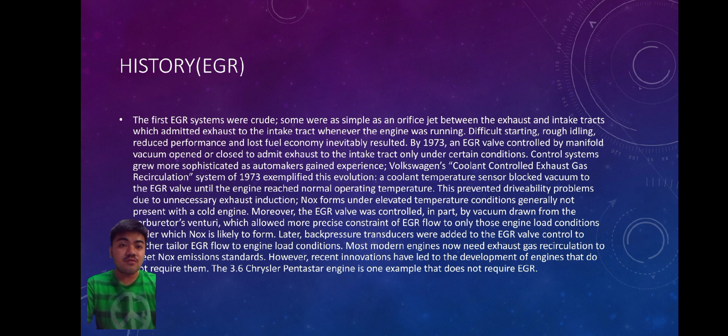The exhaust gas contains water vapor and carbon dioxide, which both have lower heat capacity ratio than air. Adding exhaust gas therefore reduces pressure and temperature during the isentropic compression in the cylinder, thereby lowering the adiabatic flame temperature. In a typical automotive spark-ignited engine, 5% to 15% of the exhaust gas is routed back to the intake as EGR.

The maximum quantity is limited by the need of the mixture to sustain a continuous flame front during the combustion event. Excessive EGR in a poorly set up application can cause misfires and partial burns.

Although EGR does measurably slow combustion, this can largely be compensated for by advancing spark timing. The impact of EGR on engine efficiency largely depends on the specific engine design, and sometimes leads to a compromise between efficiency and NOx emissions.

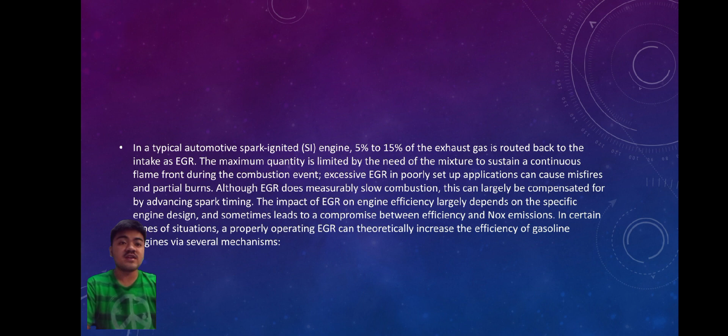In certain situations, properly operating EGR can theoretically increase the efficiency of gasoline engines via several mechanisms. First, reduced throttling losses: the addition of inert exhaust gas into the intake system means that for a given power output, the throttle plate must be opened further, resulting in increased inlet manifold pressure and reduced throttling losses.

Second, reduced heat rejection: lowered peak combustion temperatures not only reduce NOx formation, they also reduce the loss of thermal energy to combustion chamber surfaces, leaving more available for conversion to mechanical work during the expansion stroke.

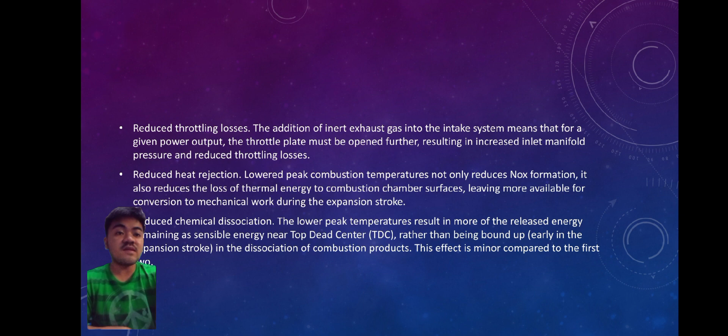Third, reduced chemical dissociation: the lower peak temperatures result in more of the energy remaining as sensible energy near top dead center, rather than being bound up in the dissociation of combustion products. This effect is minor compared to the first two.

EGR is typically not employed at high loads because it would reduce peak power output, since it reduces the intake charge density. EGR is also omitted at idle because it would cause unstable combustion, resulting in rough idle.

Since the EGR system circulates a portion of exhaust gases, over time the valve can become clogged with carbon deposits, which will prevent it from operating properly. Clogged EGR valves can sometimes be cleaned, but replacement is necessary if the valve is faulty.

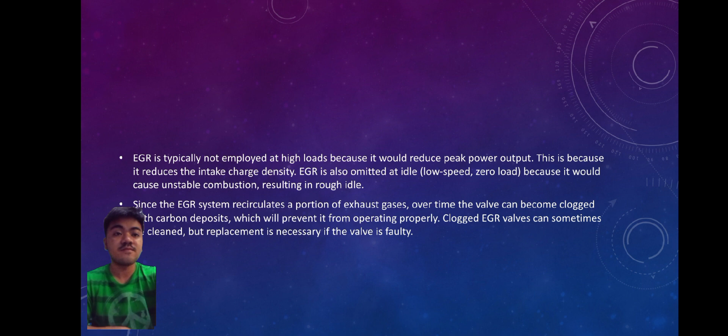In internal combustion engines, exhaust gas recirculation, or EGR, is a nitrogen oxide, NOx, emissions reduction technique used in petrol or gasoline, diesel engines, and some hydrogen engines.

EGR works by recirculating a portion of an engine's exhaust gas back to the engine cylinders. The exhaust gas displaces atmospheric air and reduces oxygen in the combustion chamber. Reducing the amount of oxygen reduces the amount of fuel that can burn in the cylinder, thereby reducing peak in-cylinder temperatures. The actual amount of recirculated exhaust gas varies with the engine operating parameters.

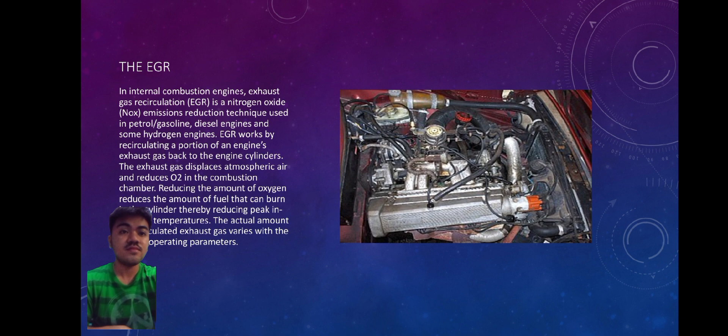In the combustion cylinder, NOx is produced by high temperature mixtures of atmospheric nitrogen and oxygen. This usually occurs at cylinder peak pressure.

In a spark ignition engine, an ancillary benefit of recirculating exhaust gases via external EGR valves is an increase in efficiency, as charge dilution allows a larger throttle position and reduces associated pumping losses.

Mazda's turbocharged Skyactiv direct injection gas engine uses recirculated and cooled exhaust gases to reduce combustion chamber temperatures, thereby permitting the engine to run at higher boost levels before the air-fuel mixture must be enriched to prevent engine knocking.

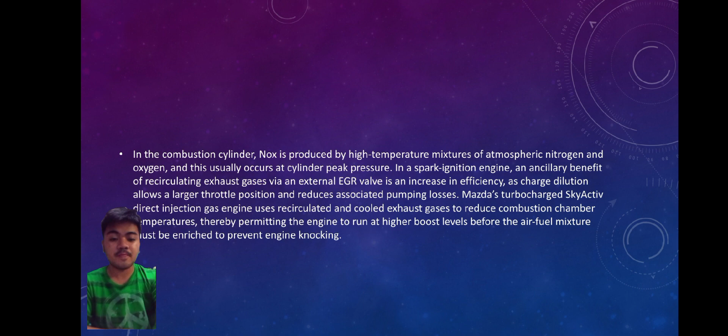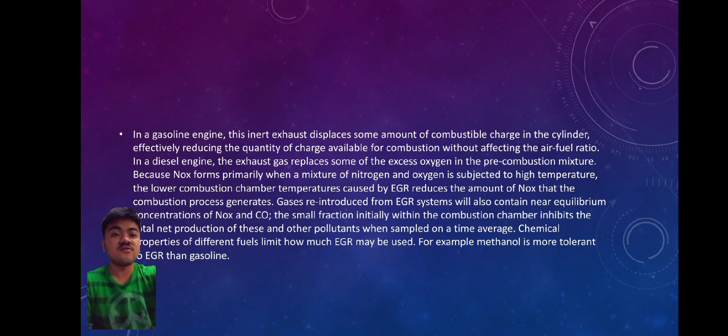In a gasoline engine, this inert exhaust displaces some amount of combustible charge in the cylinder, effectively reducing the quantity of charge available for combustion without affecting the air-fuel ratio.

In a diesel engine, the exhaust gas replaces some of the excess oxygen in the pre-combustion mixture, because NOx forms primarily when a mixture of nitrogen and oxygen is subjected to high temperature. The lower combustion chamber temperatures caused by EGR reduce the amount of NOx that the combustion process generates.

Gases reintroduced from EGR systems will also contain near equilibrium concentrations of NOx and CO. The small fraction initially within the combustion chamber inhibits the total net production of these and other pollutants when sampled on a time average. Chemical properties of different fuels limit how much EGR may be used.

For example, methanol is more tolerant to EGR than gasoline.

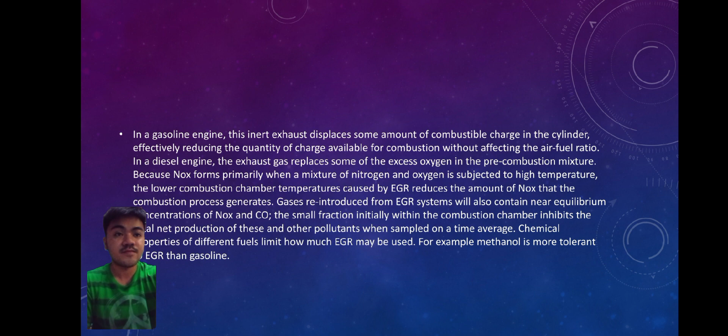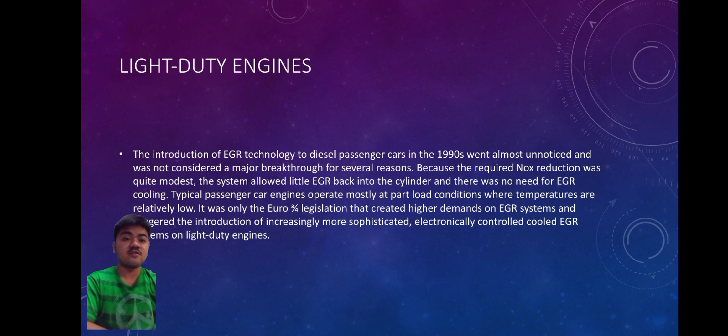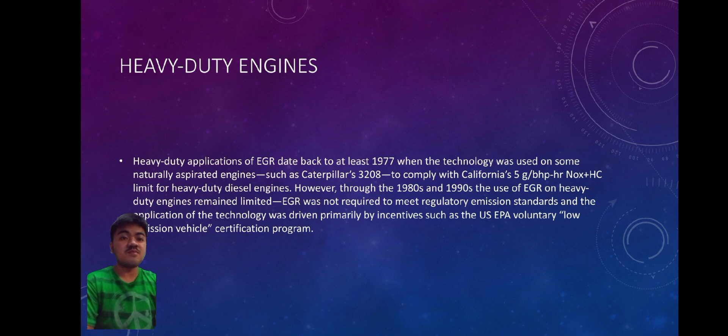However, through the 1980s and 1990s, the use of EGR on heavy-duty engines remained limited. EGR was not required to meet regulatory emissions standards, and the application of the technology was driven primarily by incentives such as the US EPA voluntary low emission vehicle certification program.

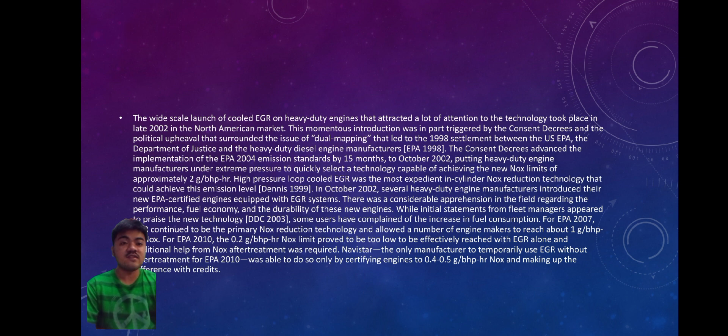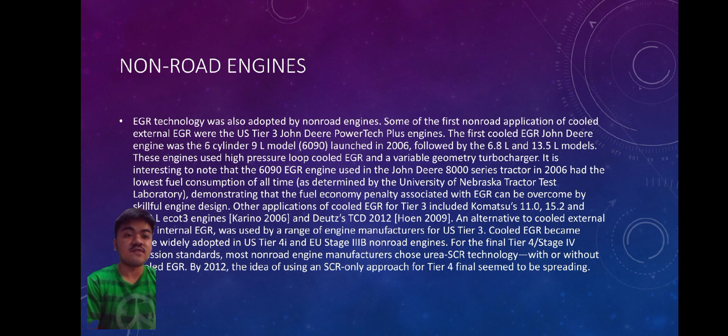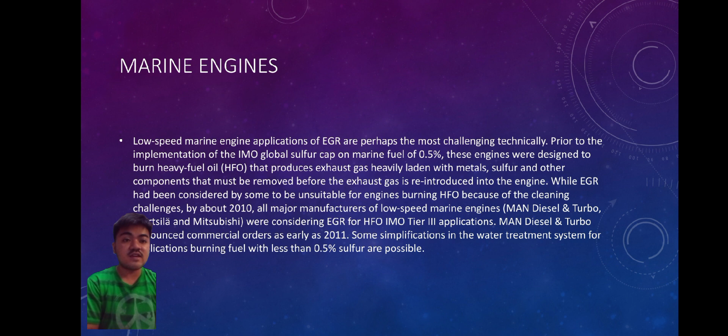Some simplifications in the water treatment system for engines burning fuel with less than 0.5% sulfur are possible.

Future trends. Many advanced combustion concepts under development, for instance low temperature combustion, utilize very high EGR rates for emission control. This is likely to put even more demand on future EGR systems and their components if the application of LTC over a significant portion of the engine operating map becomes commercial.